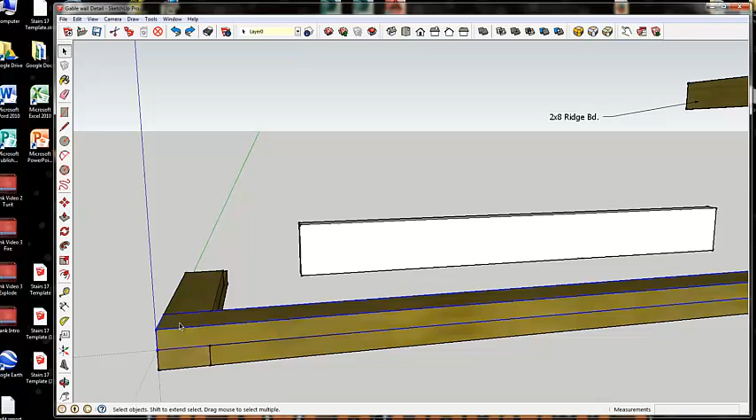So the first thing you want to do is take your measuring tape and draw some guidelines here out from that edge. And I'm going to put them out at 12-inch increments here. So there's my first one. Let's do another one here. I'm going to put 3 in for now. All right, so there's my three 1-foot increments.

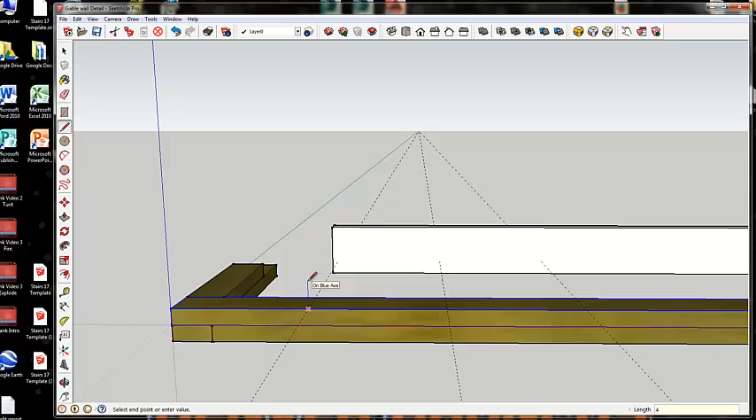And the next thing I'm going to do is draw lines up from that, exactly my rise for every 12 inches of run. Now remember I said for every foot you go this way, it's going to go up 4 inches. So there's my first one. My second one will be from here. Now remember this is another foot, so we've got to go up another 4 inches. So this one will be up twice that amount, or 8 inches.

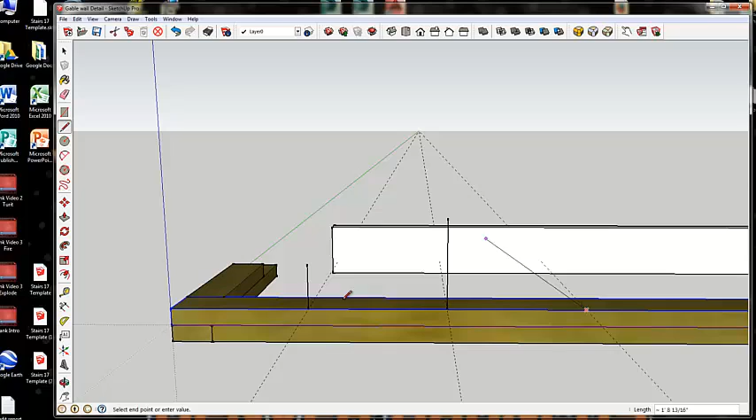And then the third one here is going to come up a total of 12 inches because you have one 4-inch rise, another 4-inch rise, and here's your third 4-inch rise. So this one is going to come up 12 inches. So there is my slope. And you can see if I take the line and continue it here, here is that 4 in 12 slope that the rafter is going to line up on.

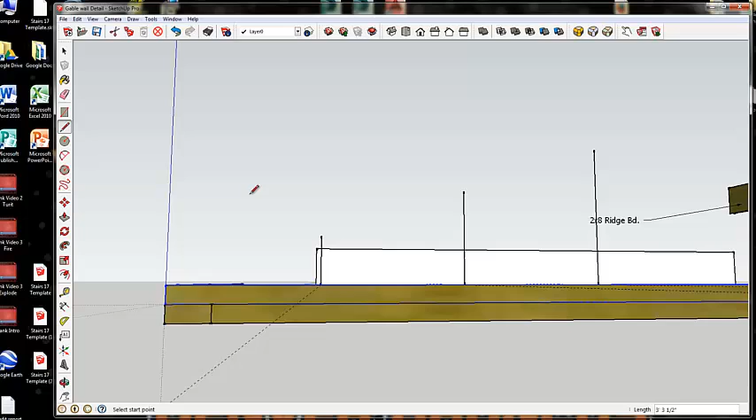Now all I need those lines going up for are kind of like guidelines. And I'm going to take this rafter now and line it up on these points. And it'll be real slick the way this works. So take your move tool, select that, and move this rafter and drop it on this corner. Now all you have to do is rotate the rafter up and touch that point, and you'll get your exact angle that you need. So Q, you'll remember, is rotate.

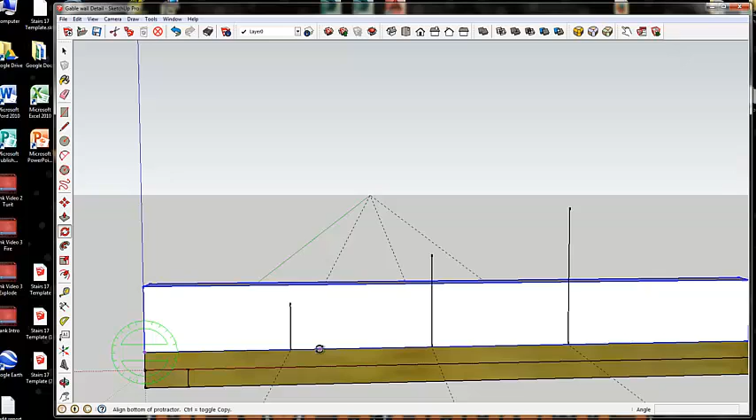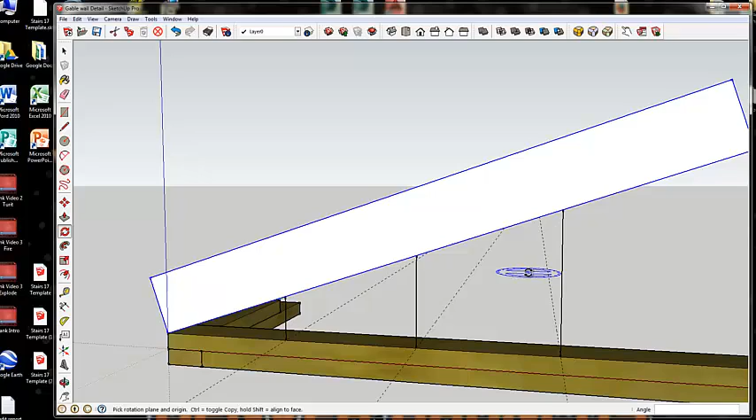I'm going to go here, rotate this up, and touch that corner right there, and you can see what it's done. It's set that rafter right on those lines that I pre-drew. Now I really don't need those lines. All I really needed was one of them. I kind of laid it out so you could see, but really all you have to do is come out here a couple feet, bring up whatever distance your slope is going to be, create a point, and drop that rafter on it. So let's erase these lines right now because we really don't need them.

And the rafter now is sitting at the exact angle that it needs to be. The next thing I need to do is extend this rafter tail out over the end of the building. So let's do that. I'm going to select this group. It's already been made in a group. And I'm going to pull this out a little bit so it hangs out. So there's my rafter tail hanging off.

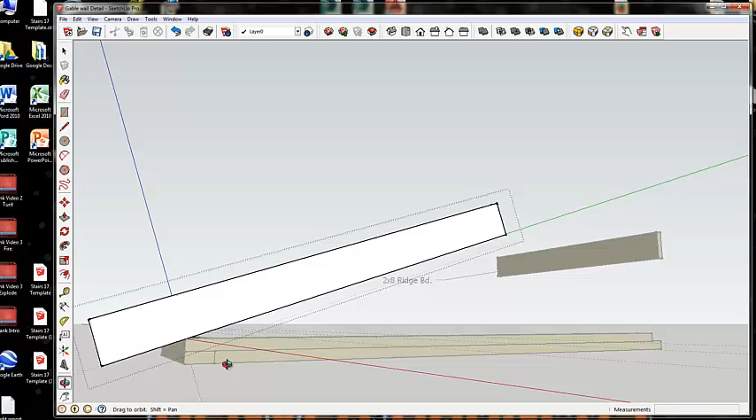Now the last thing I want to show you is how to make a bird's mouth on this. A bird's mouth is where this rafter has to actually intersect or connect on this corner of the building. And to do that, we're going to lower this down, and it will actually cut into the top plate here. So let's do that. I'm going to use move, and I'll zoom in close so you can see it. I'm going to pull this down halfway. So you can see I hit the midpoint there of this 2x4.

Now what I've got is a bird's mouth there that's cut into that, and I need to take away this part of the rafter. So to do that, I need to edit it. I double click on my group, use the line tool, and you're just going to draw lines from there to there to there. And now you can use push-pull and push this out. And all I have to do is touch this back edge along here, and it takes out that part.

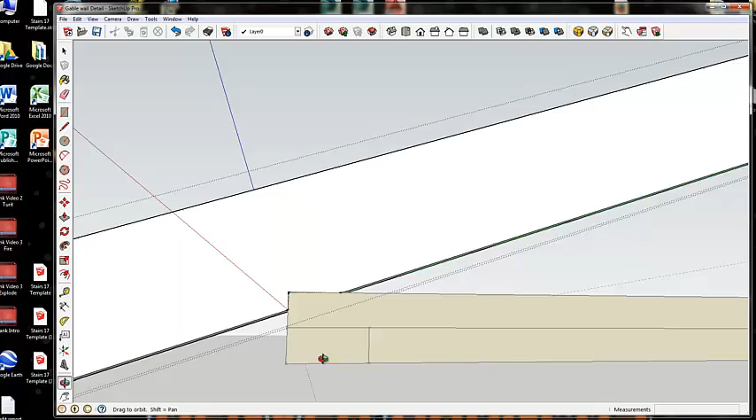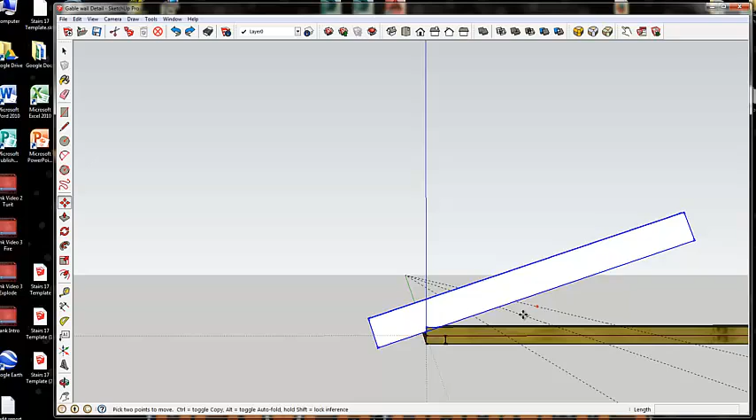So now you can see I've actually cut out that board, and I'll move it up just a little bit so you can see the hole that it actually cut out of there. And that's a really handy way to cut that bird's mouth in there. I'm going to set it back down on there. So there you go. There's your first one finished up. The next video is going to show you how to make these little supports for the rafters and how to put in the ridge board up above.